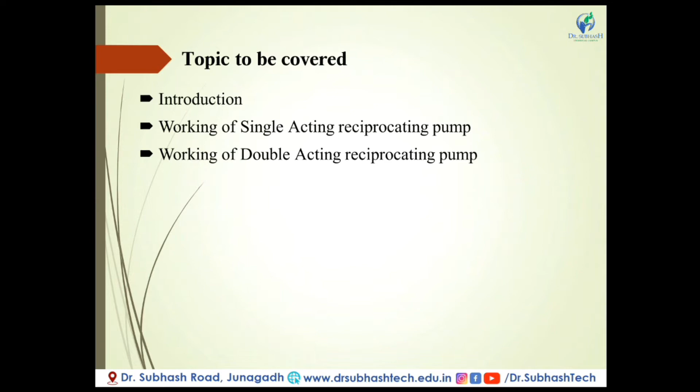Today we have to study about single and double acting reciprocating pump. The topic is subject of basic mechanical engineering. Topics to be covered in this video: introduction of the pump, working of single acting reciprocating pump, and working of double acting reciprocating pump. Single acting works on a single side and double acting pump works on both sides of the piston. We will cover this in detail in our next slide.

Introduction: the reciprocating pump is a positive displacement pump which operates on the principle of actual displacement or pushing of liquid by a piston or plunger that executes a reciprocating motion in a closely fitting cylinder. What is the meaning of positive displacement? It means that we push the liquid or air by a piston cylinder arrangement, that's called positive displacement.

The principle of positive displacement is pushing of liquid by the piston or plunger enclosed by a closely fitted cylinder. The liquid is alternately drawn from the sump and filled into the suction side of the cylinder, then led to the discharge side of the cylinder and emptied to the delivery pipe.

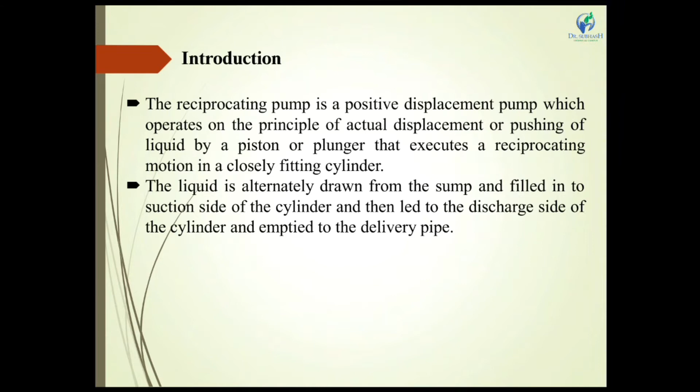First, the liquid is sucked from the suction tank and enters into the suction line. Then the liquid enters into the cylinder. After the compression stroke, the liquid is pressurized and comes out from the delivery line and goes to the delivery pipe to the empty tank. This is the single acting reciprocating pump diagram.

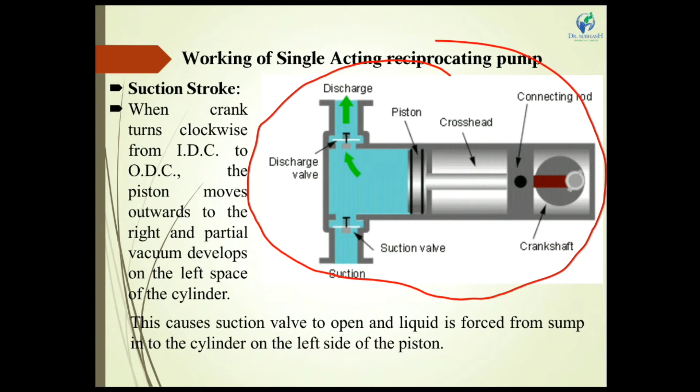First we have to know all the component parts. This is the crankshaft which rotates in a circular motion and is driven by an external motor. Next is the connecting rod, which is connected with the piston shaft and crankshaft.

Then the cross head, which is connected directly to the piston. This is the piston. There are two black lines to note, called piston rings. They give insulation from the piston top side to the piston downside, meaning this side is the liquid and this side is the atmospheric condition. We cannot let them interchange with each other through the pressure fluid through the piston, so the piston ring is provided.

This is the suction line where the water enters. This is the discharge line where the water exits from this point. The most basic function of the suction valve and discharge valve is that both valves run on pressure difference. This valve is a one-way valve. It allows water or working fluid out one way, and in the other condition it does not work on reverse flow. For this we have to put that type of valve.

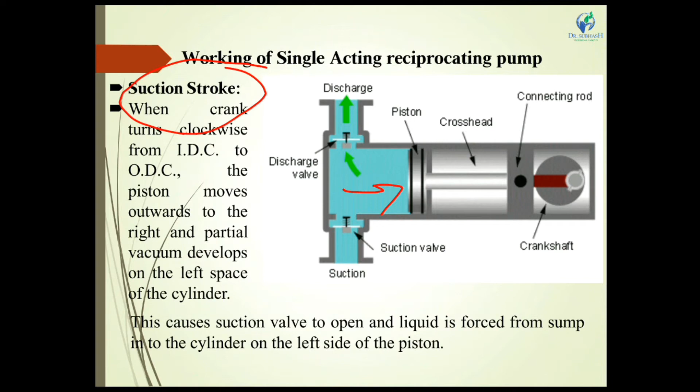This causes the suction valve to open, and liquid is forced from the sump into the cylinder on the left side of the piston. This is the first stroke, the suction stroke. The next stroke is the discharge stroke.

In the discharge stroke, the crank moves another 180 degrees, meaning another half revolution. The piston moves from right side to left side, which decreases the volume. The volume decreasing means that the pressure is increased inside the cylinder and the water is pressurized into the cylinder.

After this, the suction valve is closed and the discharge valve is open. This pressurized water comes out from the discharge valve to the discharge line, and this water goes to the overhead tank. In this stroke, the water is pressurized by the piston and comes out from the cylinder.

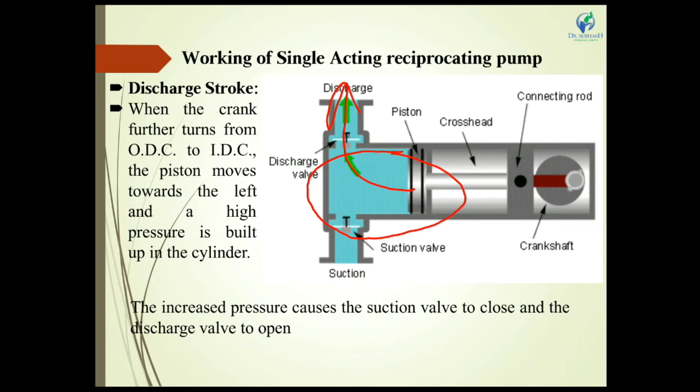The suction and delivery stroke are alternately carried out and liquid is pumped from the sump to the discharge tank. In one stroke it sucks the water from the suction tank into the cylinder, then in the second stroke the water is pressurized by the piston and comes out from the cylinder. This means one time water inlet and one time water outlet.

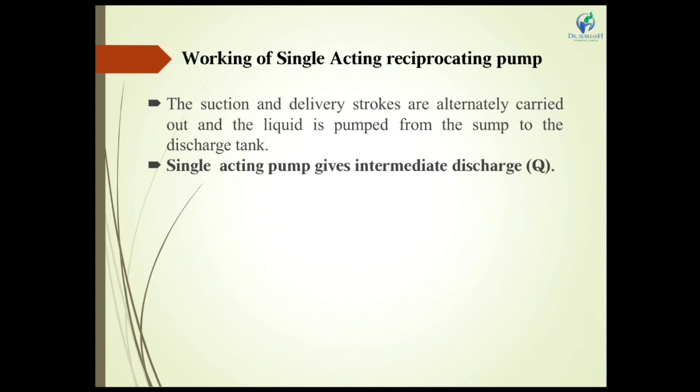The main point to note after completing the single acting reciprocating pump theory is that the single acting pump gives intermediate discharge output. It gives output one time, then the secondary time it does not give output, but at that time it sucks the water. This completes the single acting reciprocating pump topic.

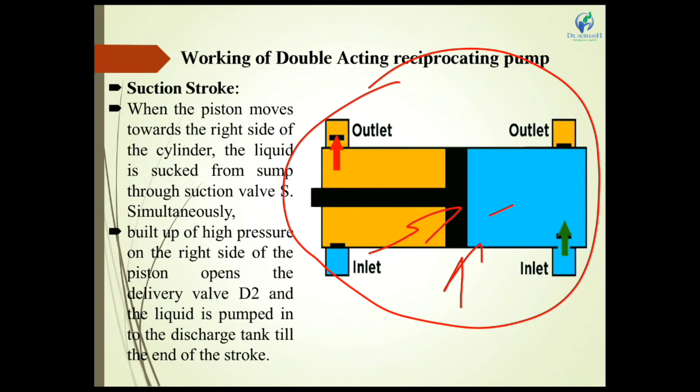Now we study the working of the double acting reciprocating pump. This is the figure of the double acting reciprocating pump. Here is the piston, working on both sides - part 1 and part 2. For part 1 there is an inlet, and for part 2 there is an inlet. Here is the outlet for both sides.

This is the piston rod, connected with the crank and crankshaft, which is connected with the electric motor. It gives circular rotation to the crank, and the crank converts rotary motion into reciprocating motion. For this pump we have to study the suction stroke.

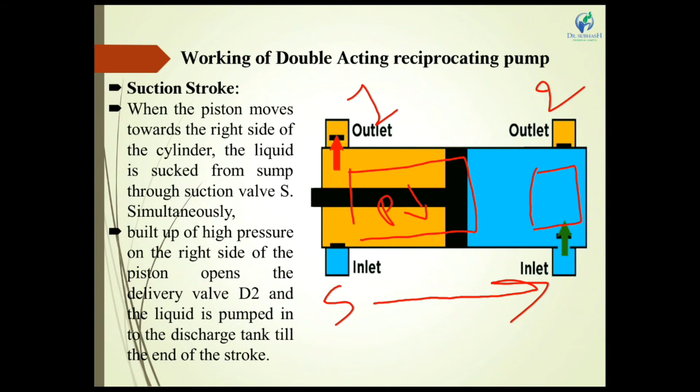When the piston moves toward the right side of the cylinder, the liquid is sucked from the suction valve S. There is portion 1 and portion 2. The volume is increasing on one side and decreasing on the other side - right side volume decreasing, left side volume increasing - so it gives lower pressure inside the cylinder and creates a vacuum.

That's the effect: the inlet valve is now open and the outlet valve is closed. Here the inlet valve is open and outlet valve is closed, with piston movement direction to the right side. The water is sucked from the suction line and enters the cylinder. This is the working of one part of the single double acting reciprocating pump.

On the other side, as the piston moves right, the volume decreases on that side, so the water is pressurized and comes out from the outlet. At this time, the inlet valve is closed and outlet valve is open. This is the valve position - crossly arranged.

Here on the first side, the inlet valve is open; on the second side, the inlet valve is closed. For the outlet side, one side's outlet valve is closed and the other side's outlet valve is open. This is the suction stroke.

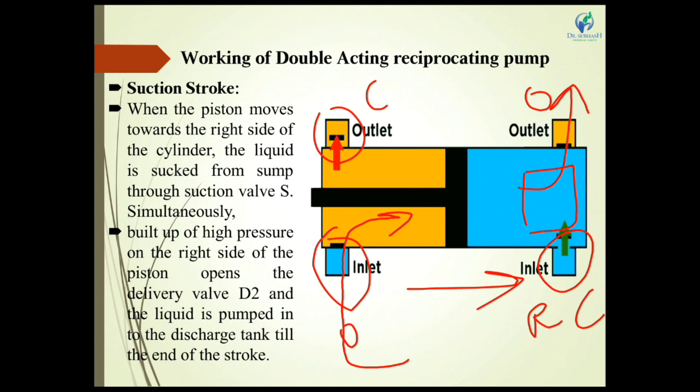Then comes the discharge stroke: the piston moves from right side to left side, meaning this portion's volume is decreasing and this other portion's volume is increasing. As an effect, pressure goes up on one side and pressure goes down on the other side of the piston cylinder, so the pressurized water comes out from the outlet valve - at this time the outlet valve is open and inlet valve is closed.

On the secondary side, pressure goes down, so the outlet valve is closed and inlet valve is open. So the condition is that for portion 1 the water comes out from the outlet line and goes to the top head tank, while on the other side water is sucked from the suction tank and enters the cylinder. This is the discharge stroke.

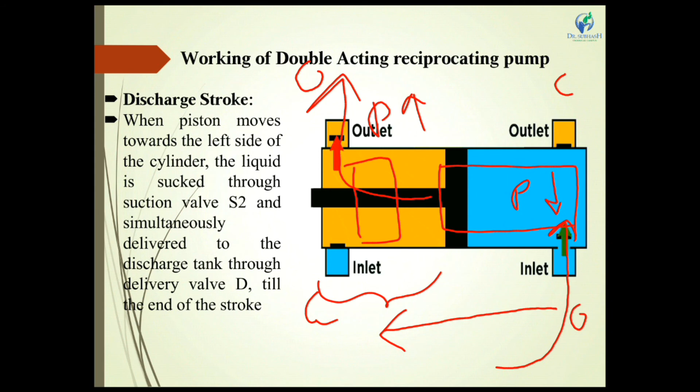When the piston moves toward the left side of the cylinder, the liquid is sucked through suction valve S2, meaning suction happens simultaneously with delivery to the discharge tank at the discharge outlet point. This is the end of the stroke.

Here the working of the fluid is such that both sides are active, and the pistons on both sides are active parts. So we have to say that this is the double acting reciprocating pump.

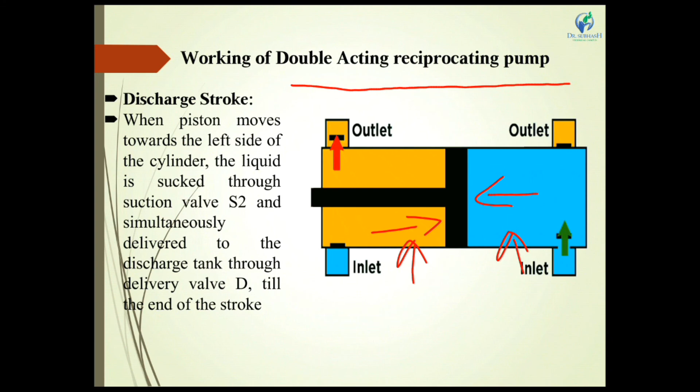Next, double acting pumps give more uniform and continuous discharge compared to single acting pumps. The single acting pump gives intermittent output - one time it gives output, the second time it does not, the third time it gives output again, the fourth time it does not - but the double acting pump gives continuous output because the pistons on both sides are active.

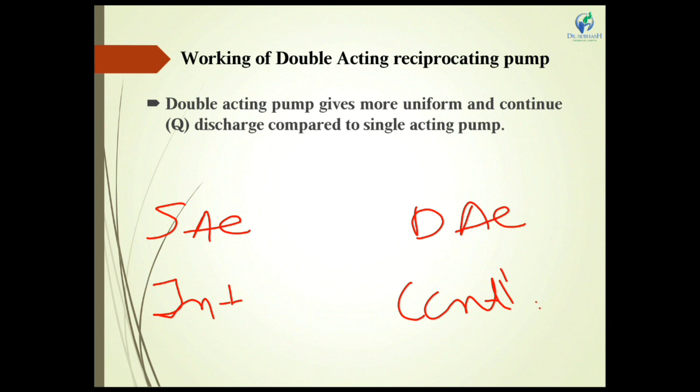Once one side is closed, the secondary side is open - there is the outlet. Comparing the two: one is open while the other is closed, but since they work simultaneously, one side is continuously working, giving a continuous output from the cylinder and a more uniform flow of discharge.

In summary, single acting reciprocating pumps give less discharge and non-uniform output, while double acting reciprocating pumps give continuous and higher discharge output. But both types of pumps are not pressurized pumps - these are simple working types of pumps: single acting reciprocating pump and double acting reciprocating pump.

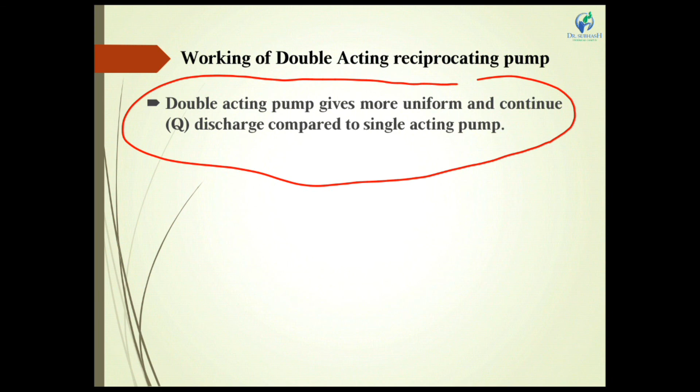But at the end of the theory, this sentence must be written to complete the theory.